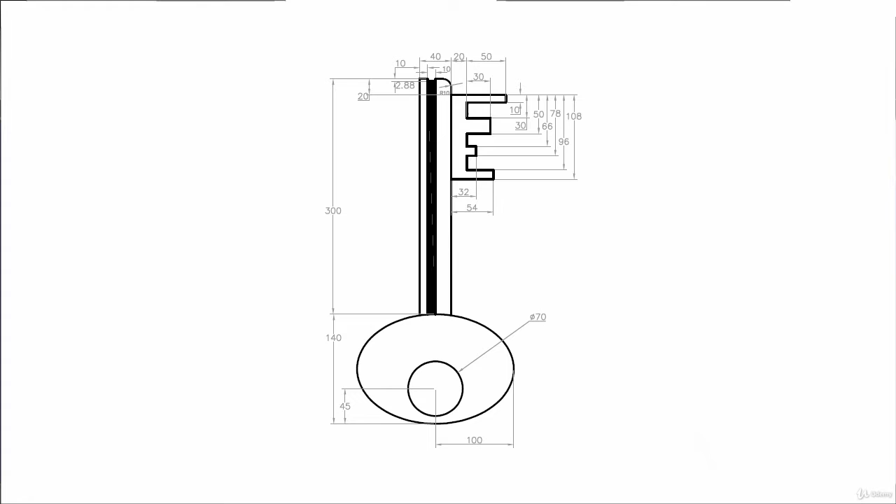In this video, we'll learn to make this simple key shape. So for this, I'll start with the rectangle tool. So I'll go to the rectangle and click anywhere in the drawing area to start this one and then type at. Because we are starting our rectangle from any random point, we'll add this at sign.

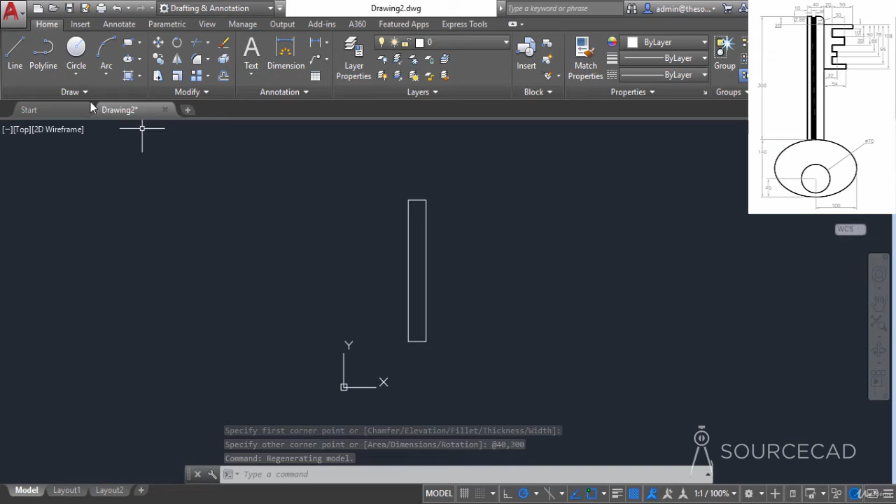Now add the length as 40 units and the height as 300 and press enter. Well, that's the straight rectangle. Alright, now I'll go to the line tool and I'll start from this vertex and I'll move in the downward direction and then enter a length of 20 units and press enter.

Now from this point we'll start making the key shape, and this length is obviously 70 as you can see in the dimensions. Press enter. Now move downwards, enter the length of 10 units, press enter. Now move to the left and this length is 50 and press enter. Now once again move downwards and this length is 20 units.

Then move to the right and the length is 30. So 30, press enter. Now once again I'll move downwards and again this length is 20, press enter. Now move to the left and I should just track this point because that's equal to that length.

Now once again I'll move in the downward direction, but this time the length is different. It's not 20, actually it's 16, and you already have the dimensions in the drawing, so you can find out that value. So I'll type 16 and press enter. Now I'll move to the right and this length is 12 units, so I'll type 12, press enter and move in the downward direction, and again this is 12, press enter.

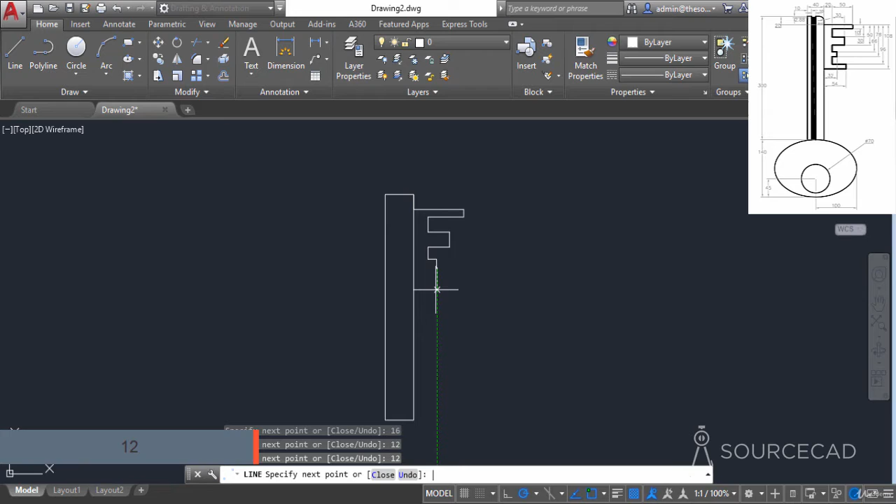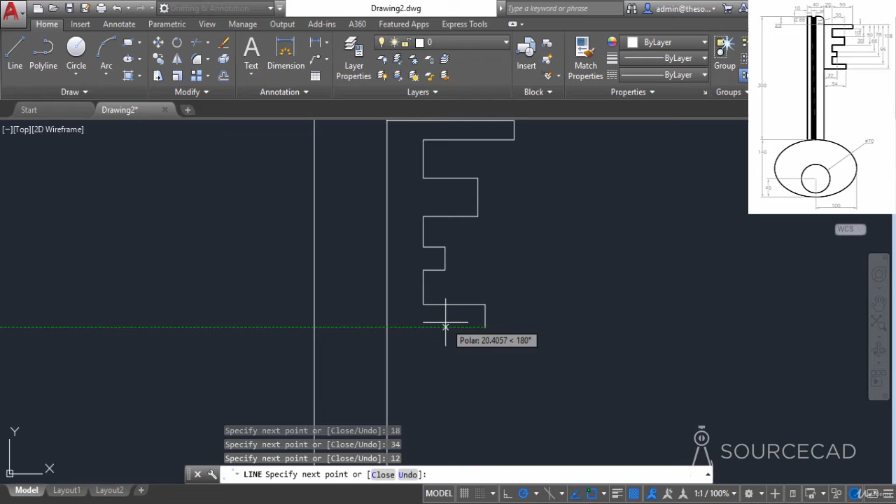Move to the left and you should track this point again because that's equal to this one, and again I'll move in the downward direction and this length is 18, so I'll type 18 and press enter. Now I'll move to the right and this length is 34, so 34, press enter. Again I'll move in the downward direction and finally this length is 12 units, so 12, press enter and join it with this line. Well, that makes our key shape.

Okay, so now we have made the basic key shape. Let's add the details to this. And to add the details, I'll start with the Fillet tool. But before that, let's explode this polygon. So I'll go to the Explode tool, select this polygon and press enter. Well, now it's exploded as you can see. Also, we have an overlapping line here. So I'll select that one and get rid of it.

Okay, so now go to Fillet and add a radius of 10. So I'll go to Radius, add the radius value of 10. And I'll add the radius on these two vertices. Well, there we have it, the radius. Go to Offset and now add an offset distance of 10 units and press enter. Now I'll click on this line and click to the right. Again click on this line and click to the right because the next offset is also 10.

Now I'll go to Offset again, and this time I'll add an offset distance of 2.88, press enter. Now I'll zoom into this area, select this line and offset it in the downward direction like this. Okay, so we have added the details. Now let's get rid of some of the extra lines. For that I'll go to Trim, press enter, and I'll get rid of this one as well as this one and this one. Okay, now we have the details here.

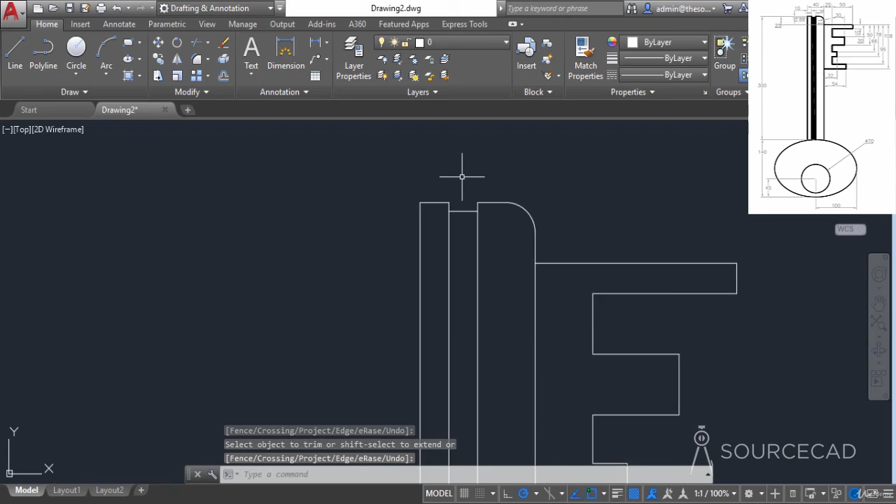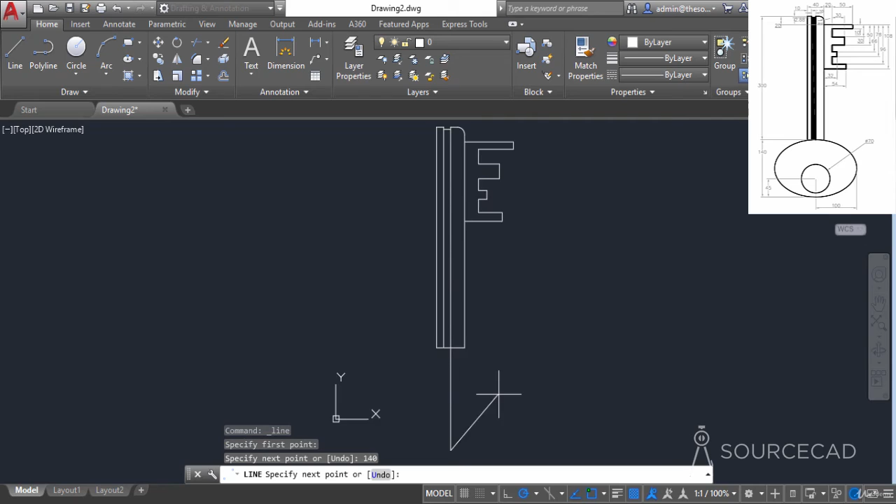Let's add the details on this side, and for that I'll start with the line tool. So I'll go to line and I'll start with the midpoint of this complete line, and this one is the midpoint because the total length is 40 and up to this point it's 20, so that's the midpoint. And I'll add the length of 140 units and press enter. Well, there we have it, the line of length 140.

Now I'll add the ellipses, and for that I'll go to this center ellipse. Now I'll select the midpoint of this line and now specify the endpoint. So in this case the endpoint is 100 units towards the right, and the second endpoint is right here. Okay, so that's our first one. Now let's get rid of this line and I'll start the line tool again, but this time I'll start the line right from this intersection point, and this distance is 45. You can see this distance in the drawing as well.

And now we need to add the circle. So I'll go to circle, go to this endpoint, and now add a circle with radius 35 or the diameter of 70 units. You can see the diameter of 70 units there. So now our drawing is almost complete. We need to add little details here as well as here.

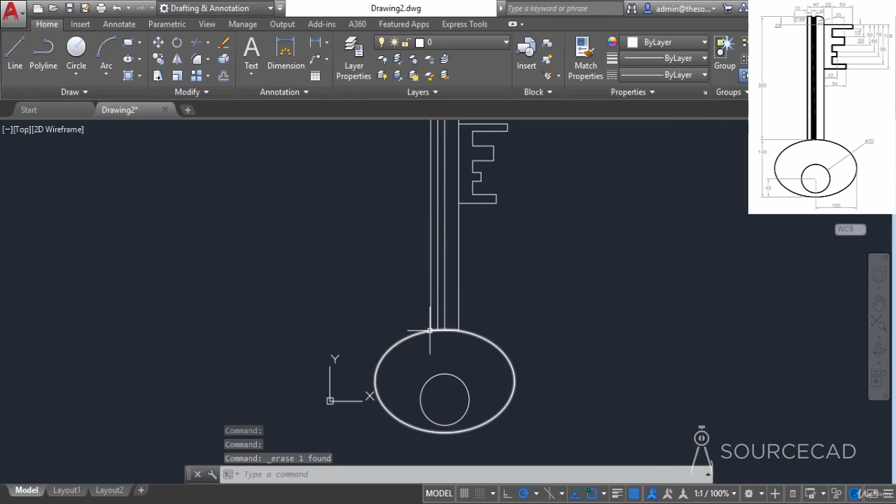So when you zoom into this area, you'll notice that we have some gap here. So you need to get rid of that. So select the line, erase it. Go to the Extend tool, press enter, click on this one, as well as this one. And that's extended to the required length.

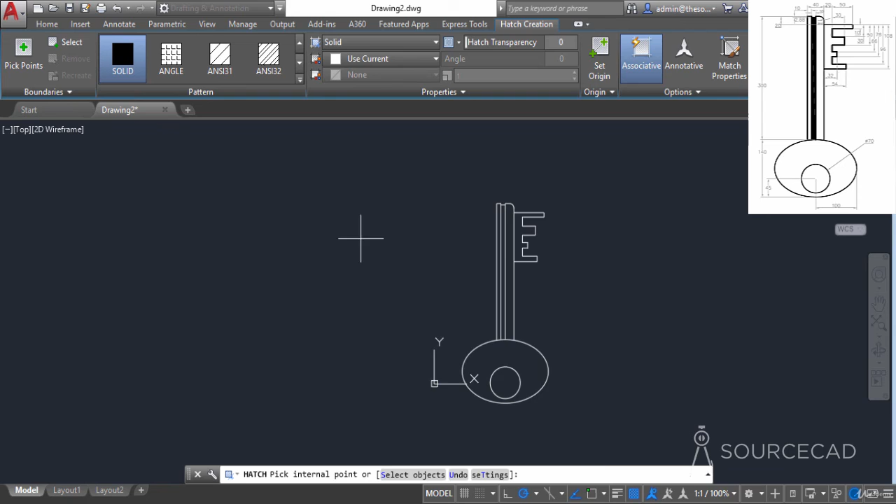Now let's go to hatch. And we'll apply the solid hatch wherever it is required. So I'll go to the solid hatch pattern, zoom into this area and select this hatch. Okay, so that's the area where the hatch is to be applied. And I'll click on close hatch creation, and that's our final drawing.